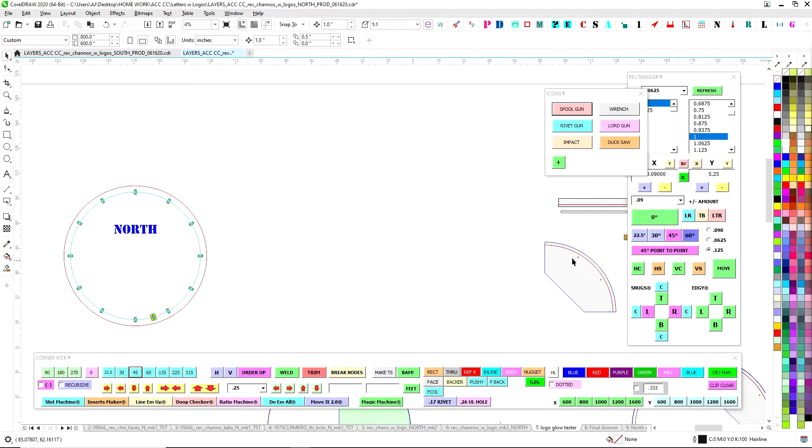The circles here will kind of represent where the mounts will go. Those won't really come into play for this, but just kind of give you an idea of, fight like you train, train like you fight.

So this will be 090. That'll represent this. This is to be the backer. This will be the return 090, and I'll give you this little guy here. I think we're going to have to just use this no matter what. It'll also give it a little bit of strength too, so it'll be good, but this will be sort of a rib that we'll weld in.

So what we have here is the return. We can go ahead and figure out the depth here. We can maybe extend this a little bit later, but for right now we just need to figure out this thing to see how this glows, and then we can work that later.

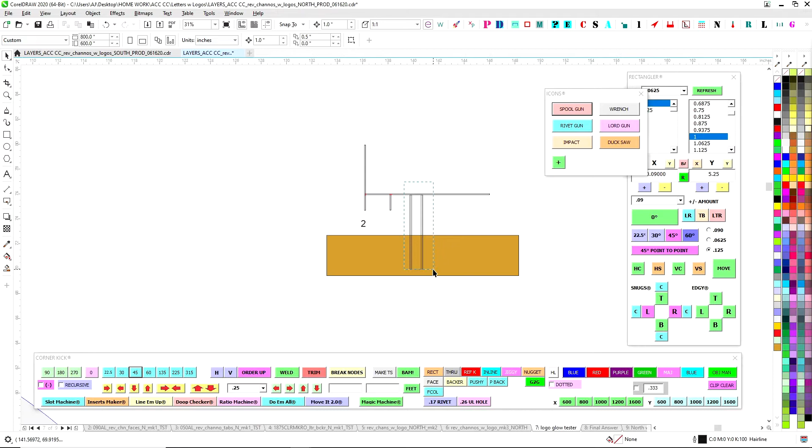So this represents the standoff that we will make later. You won't have this right now, don't worry about it, but this is just to show that the holes are 4 inches in, and that's where the standoffs will live. I have this at 2 inches over, so this gives us a 2-inch little track here to work with.

And we'll just use this to mimic a reverse channel letter kind of glow thing, minus the polycarbonate. We don't need to put polycarbonate, I don't think. The idea is to keep this 2 inches from the wall.

So when you do your tester, you won't have this, don't worry about that, but just go ahead and kind of hold it or fake it so you got 2 inches here, because that's what the channel letters will be off of. And then the idea is to have your LED, hopefully we can just get away with firing it directly at the wall.

Like this, or might do something like that, tuck it up in, and if this is all painted white, then this will kick over and kick over here.

I'm just worried that if we do it this way, we might get that chatter effect where, you know, how it hits this edge and then you get a shadow and you get a shadow, you get a shadow. So I don't know, but this is quite a bit away.

So we're looking at, you know, 3+ inches. So that might be enough to allow this to do whatever. You might even try over here.

This is why it's a test, but there might be a chance you can see it, but then again, I think we will get chatter if it's coming from here. So I think the best bet might be to try this, and that way it'll get rid of all the bounce, just get bounce, and then hopefully we get rid of the chatter.

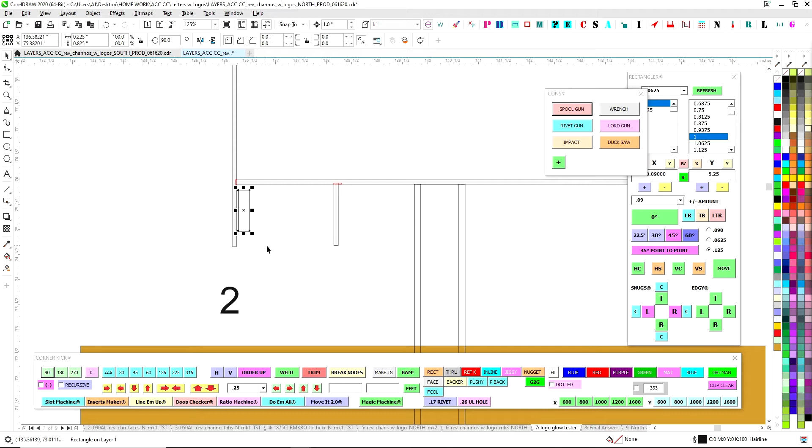This will also keep us from wasting photons and having the light go all the way to the inside of the thing here, which does us no good. So this will help concentrate our light. So the way I see it is...

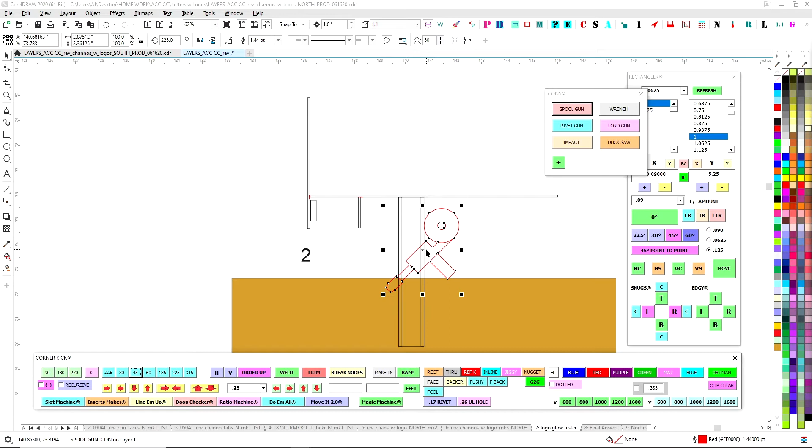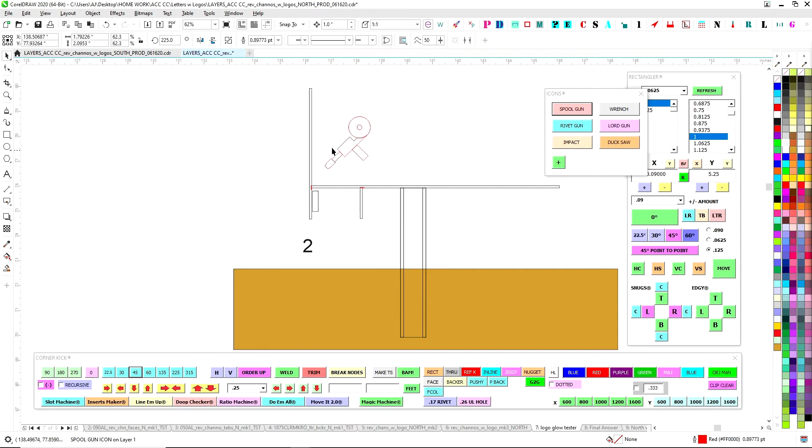Go ahead and set the backer up on your table up high enough to where you got room here. So take the backer, put it on a block of some sort, and then go ahead and set this in the groove to the top there and weld on this side only all the way around, just like a reverse channel letter.

And just go ahead and weld all the way, just tack it together. And then I would go ahead and, once that's done, flip it over and go ahead and work from this side and weld in here on the inside.

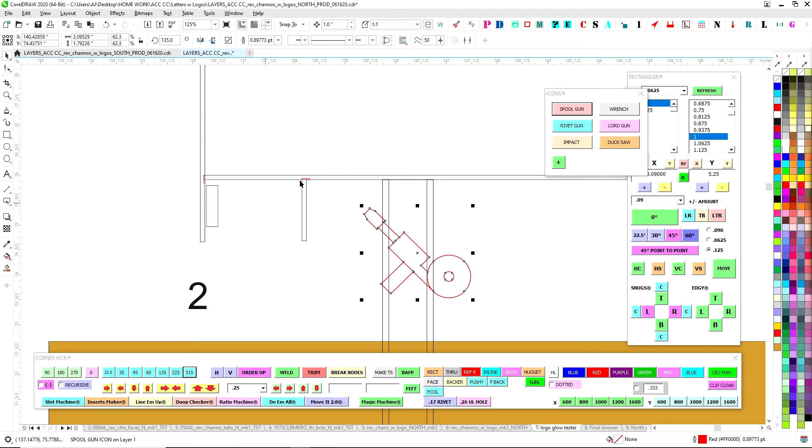And then that way you can keep this whole area a no-fly zone for welds. That way it's nice and clean, and you don't have any weld slag or anything like that. So then if you want to, tuck an LED right up against or over here, you're not dealing with welds. So keep your welds here, keep your welds here.

And that's kind of how I see you'll do it for the whole big piece. The whole idea will be that this will be in 2 sections, 2 half sections this way. So you'll have a seam here.

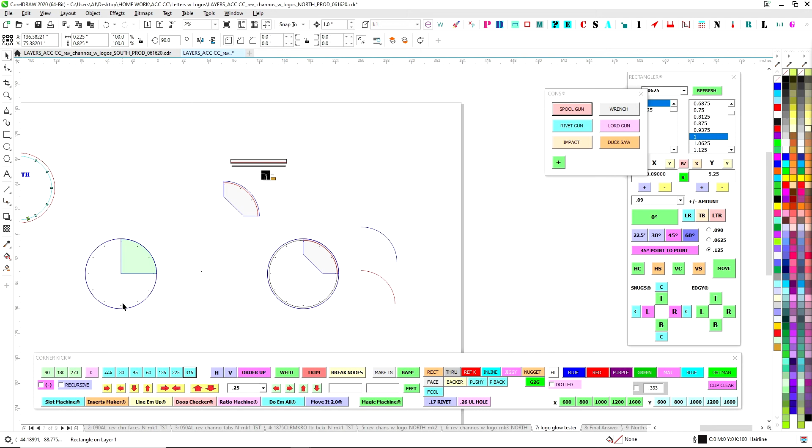So you'll put the 2 backers together, you'll weld all this together, and then you can secure it onto your table. And then we'll break the returns into 4 pieces, but we'll stagger it.

So that way you'll have a whole piece across here. It'll take care of that seam and go all the way here, and then we'll have a seam there, and then you can do a piece, and then do another piece, and we'll do another piece.

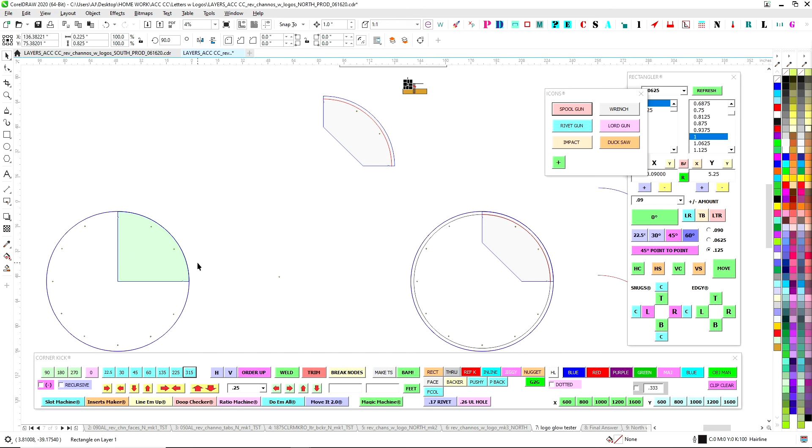And then once the whole return's on, like this, then we can flip it over, maybe on the floor or whatever, then just go around and just do the track all the way around on the inside as well. And then that way we can have that.

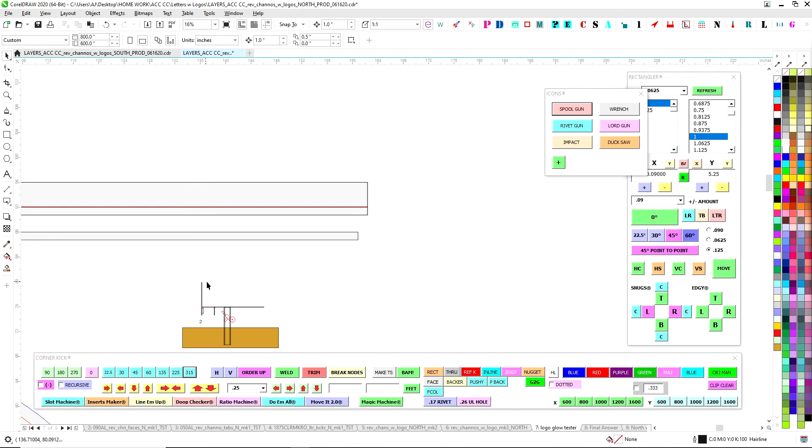It would be nice to do that with some flat white like we do. So anyway, so get this going. I wouldn't necessarily worry so much about the face. We're not really testing the face. It's just to get this to glow. See what we come up with. All right.